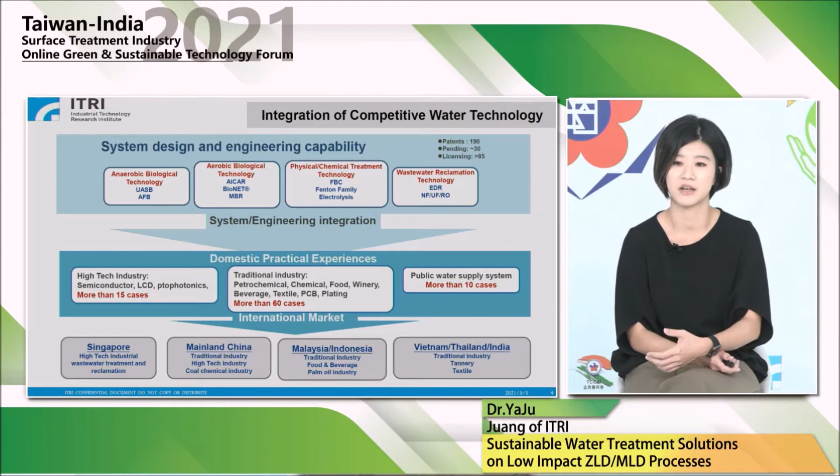And not only in domestic practice, such as high-tech, traditional industry, as well as government projects. We also have many cases and many clients around the world, like Singapore, mainland China, Indonesia, as well as India.

So first let me talk about the low-impact wastewater treatment for the metal surface treatment industry. The metal surface finishing industry comprises a large variety of activities, and the purposes are mainly focused on the treatment of the metal surface, corrosion protection, improving resistance to wear and erosion, as well as appearance enhancement with metallic coatings.

All of these activities are divided into two main treatment categories. The first is the cleaning process and surface pretreatment, such as alkaline cleaning and some other processes. The second stage is the metallic coating and surface finish, like electroplating, electroless plating, anodization, as well as chromate conversion. From these processes, a large amount of wastewater with diverse composition is produced.

As we know, the wastewater treatment process mainly depends on the composition of the effluent, the environmental need, or the objective of each company. In some places the company has to meet the requirement of zero liquid discharge, or some companies would like to increase the water recovery rate or adjust the wastewater effluent until it meets the effluent standards.

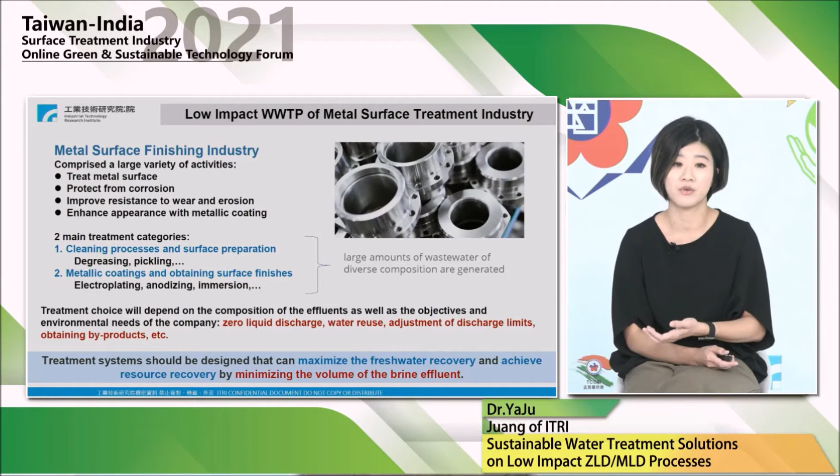So to achieve low impact wastewater treatment, the treatment system has to be designed for maximizing freshwater recovery. It means that we have to increase the recovery rate or reduce the volume of the brine or the final waste disposal products.

This slide shows the general metal finishing process. The first stage is the preparation, the pretreatment of the surface, and the second stage is the surface treatment. All of the processes produce a large amount of waste, from the rinse water effluent, from the plating baths, some from the surfactants or from the strippers. Unfortunately, most of them are non-biodegradable because they consist of persistent bioaccumulative toxic substances, such as heavy metals, cadmium, chromium, and even cyanide.

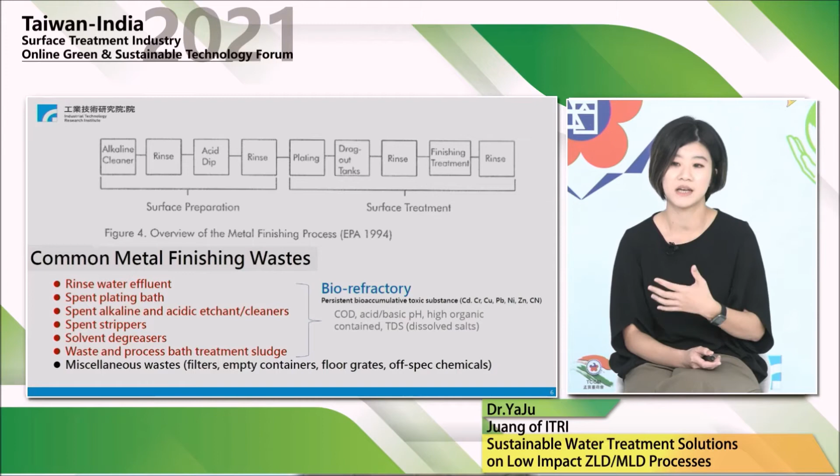So the effluent water always has a very high COD value, extreme pH values and high organic contents, as well as TDS. So let's talk about water quality. In most processes the inlet water quality plays an important role, not only in the final product quality, but also in the recovery or recycling technologies. So the elimination of the plating contaminants plays a very important role.

Here I would like to suggest some pre-treatment processes for the inlet water. The first would be ion exchange resins. The second would be the RO system, which we call reverse osmosis. In most cases, we think about the cost assessment, and we normally suggest that if your inlet water quality is higher than 500 milligrams per liter, our system will be more cost effective.

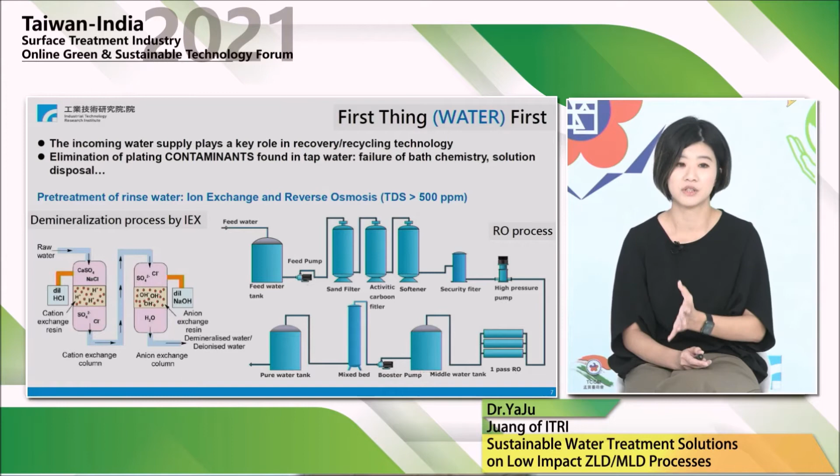As for the recycling technology for metal surface treatment waste, we always say that by the combination of proper technologies it is possible to accomplish zero liquid discharge to the sewer or stream system. It means that we can try to reduce most of the waste to the environment.

So by applying the proper process, the finisher can have more profitable resource recovery, such as recovering the process solution and sending it back to the tanks for reuse, or removing the pollutants or impurities from the process solution, which can largely extend the lifespan of your solutions, or recovering the metals or valuable resources like heavy metals, which can be reused again or sent back to the supplier.

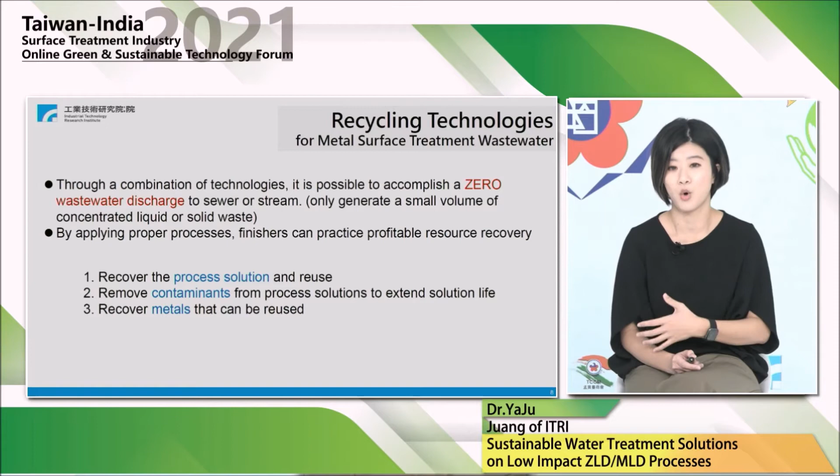So here I would like to share this process. As we know, in most wastewater treatment plants, the wastewater produced from the industrial sectors first has to be pre-treated by a physical or chemical process. Afterward, if you want to recycle the water, you have to buy a reclamation system like a membrane filtration process, such as the RO system and ultrafiltration process.

In this process, clean water will be produced. Meanwhile, a brine will also be produced, which has to be treated by the thermal process. And as we know, the thermal process has very high OPEX. The operational expense is generally quite high, around more than $10 per cubic meter.

So if we want to overcome this kind of issue, we have to think about brine reduction to reduce the need for the thermal system, as well as refractory organic decomposition. So here I would like to suggest some low impact wastewater treatment processes. The first is electrodialysis reversal, which we call the EDR system. The second is the Fenton process for organic decomposition.

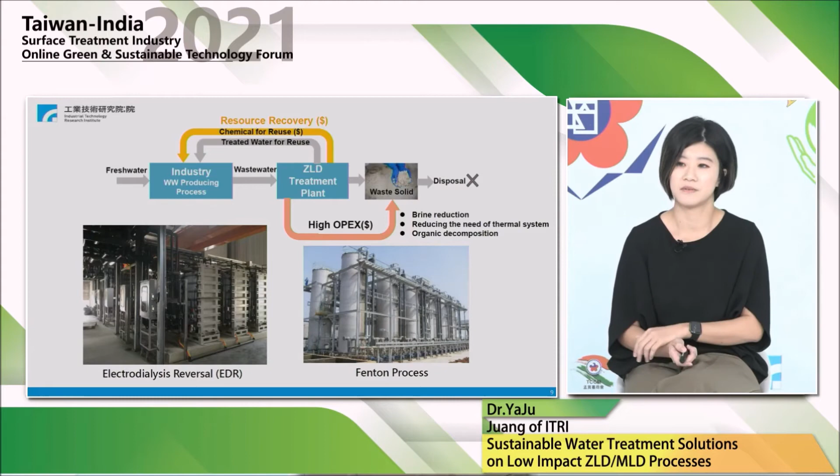So the first is the ED or EDR technology. ED, which we call electrodialysis, uses electrical charge with selective membranes to separate ions from the solution. It means that we can get clean water which is deionized. The EDR system, electrodialysis reversal, is an advanced version of the ED system that periodically reverses the polarity of the electrodes. This can prevent scaling or fouling of the membrane or the electrode system and extend the lifespan of the EDR system.

Okay, so the EDR system shows features like water softening without chemical addition, because we only separate the ions by electrical charge. So you can remove the ions from the solution. It is capable of treating lower grade effluent compared to the RO system, so it can be used for RO brine reconcentration to reduce the brine. Therefore we can obtain a much higher water recovery rate with high desalination efficiency.

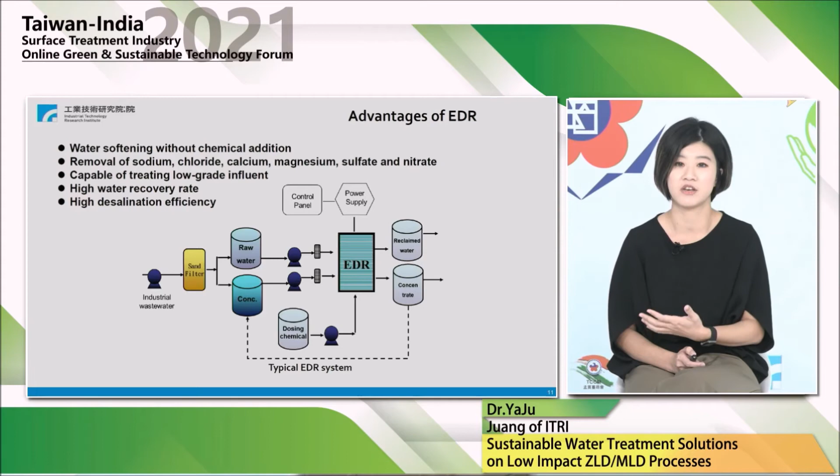So here shows one of the cases we installed in India's CETP. This CETP is a zero liquid discharge CETP. In this plant, they met an urgent issue about how to increase the water recovery rate, because the too high loading of the evaporator caused a lower recovery rate and high energy consumption. So in this case, we installed the ITRI EDR for treatment of the RO brine.

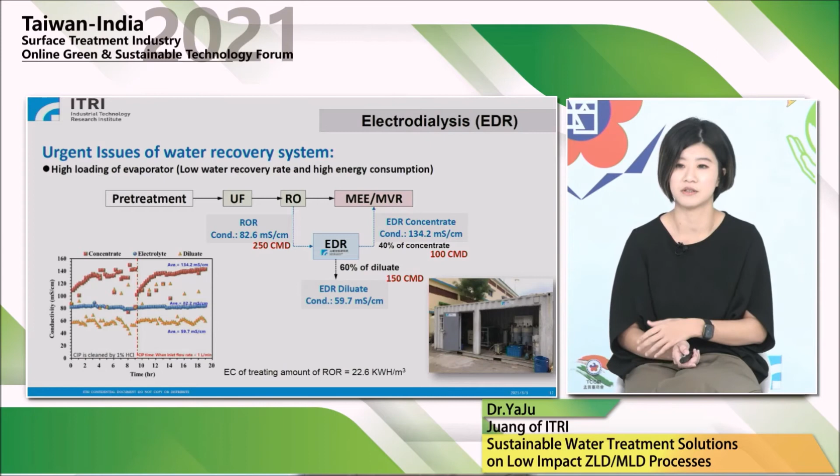The next technology I would like to share is the Fenton process, which can be applied to remove or decompose refractory organics. The Fenton process, as we know, is an advanced oxidation process, a kind of AOP, which applies the Fenton reagent, hydrogen peroxide with ferrous iron, to generate OH radicals in situ for organic decomposition.

Some people know that Fenton has at least 4 kinds of series, and I would like to suggest 2 of them. The first is the electro-Fenton for high strength wastewater treatment. The second is the FBR Fenton to treat residual organics, for polishing of the effluent water quality. The Fenton process enhances the pollutant biodegradation rate and decolorizes, with a very small footprint, and is easy to control.